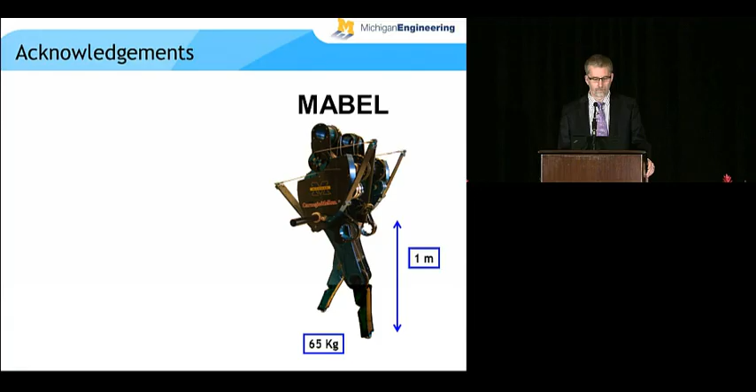So I'm here because of what my students have accomplished on Mabel. Mabel is roughly human size, but has some special features that we'll highlight shortly. The robot was designed by Jonathan Hurst, but we did all of the assembly, every bolt, every wire, every piece of electronics at Michigan, and it was done primarily by Koushil Sreenath and Hae-Won Park. Now, their control algorithm development was supported very strongly by prior work of Morris and Poulakakis, and then some technical contributions of Ramezani. And finally, it gives me a lot of pleasure to acknowledge that much of the work we've done on Mabel is based on what we had accomplished with the Robea team in Grenoble, France on Rabbit. Algorithms we implemented in 2004 are still working on that robot.

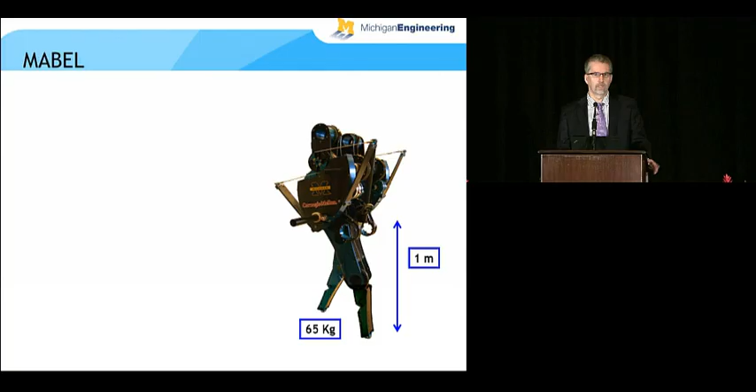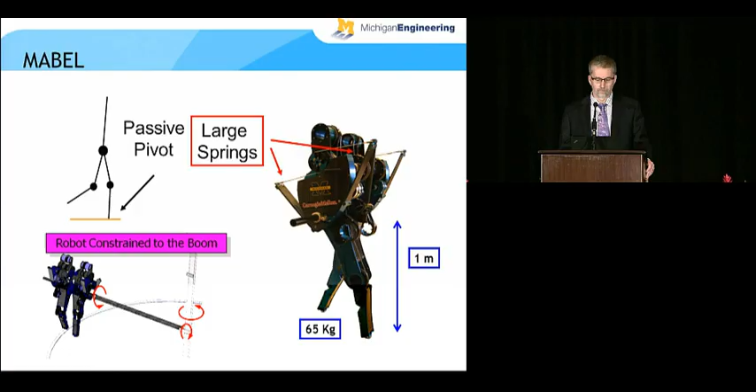In terms of sensing, it's really the minimal set. There's not a camera on the robot nor in the room. We measure joint angles, and then there are switches on the ends of the legs to detect when we have contact with the ground. Velocities are computed numerically.

So let's get an idea of what Mabel can do. So it can walk really slowly. Takes a lot of balance there. For a short time, it held a land speed record for a bipedal robot. Its nominal gait is very robust. Clearly, these are not planned footsteps.

It runs with passion. Right there, it's setting a 9-minute mile. And you have to go see it in slow motion to appreciate the elegance of the gait that Koushil and Hae-Won implemented on the robot.

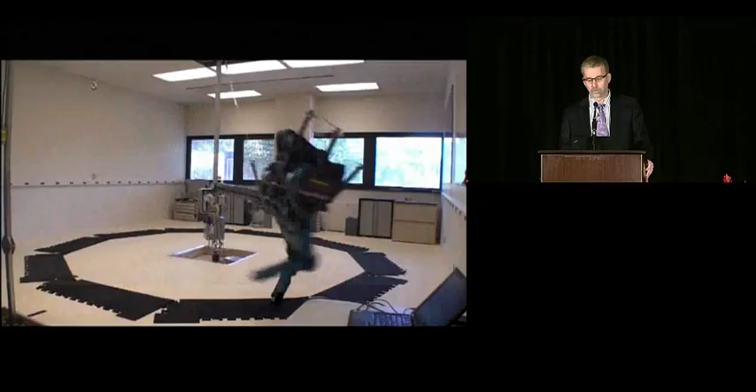Now, in all of our videos on YouTube, we terminate them with the robot falling. The purpose of that is to insist upon the fact that the bar does not hold up the robot. It provides side-to-side stability, but it's the feedback laws generating good ground reaction forces at the feet that keep the robot upright.

Okay, so here's what I want to accomplish in this lecture. Give you some background information on robots and some of the pioneers in the area. Then we'll get into the technical part of the talk on models and feedback control. Some of that will be a little bit tedious. Then we'll do experiments. Those are fun. And then we'll wrap up very quickly.

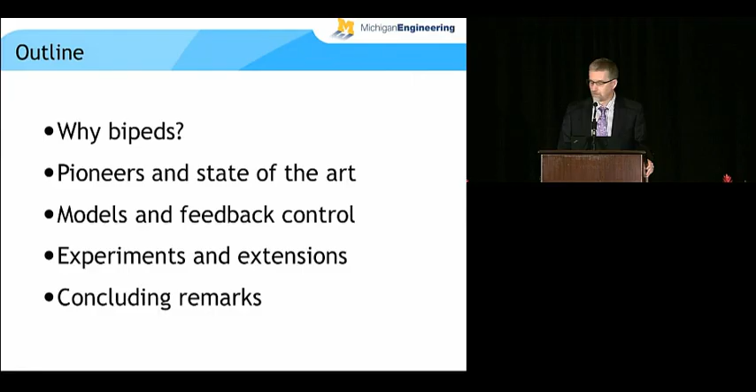Okay, so why legs and why bipeds? Well, it's estimated that 70% of the land surface of the Earth cannot be accessed with wheels or tracks. And even places where you could go with tracks, you probably wouldn't want a robot using tracks going up and down your stairs. Because of that, there is a surprising number of companies right now positioning themselves for the home service market.

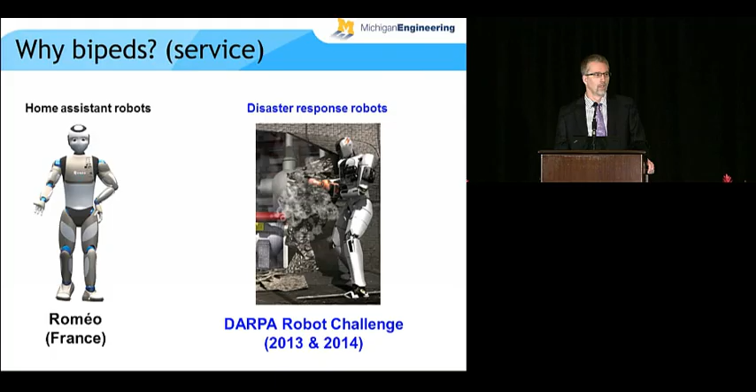Now, we all know what DARPA did for autonomous vehicles several years ago. Well, in 2013 and 14, they're having a DARPA Robot Challenge to try to do the same thing for disaster response robots. Many members of our community are on teams for this event.

Okay, let's look at some of the pioneers in the area. Some of them human, some of them not. The first walking robot is 40 years ago at Waseda University, WL5. It had a very awkward gait. But through a sequence of innovations, it's been evolved to Wabian 2, a very nice humanoid robot.

During those extensions, they came across a control heuristic that they like. They organized the posture of the robot such that the center of mass evolves as an inverted pendulum. So we will come back to these simplified models later. Try to remember, inverted pendulum.

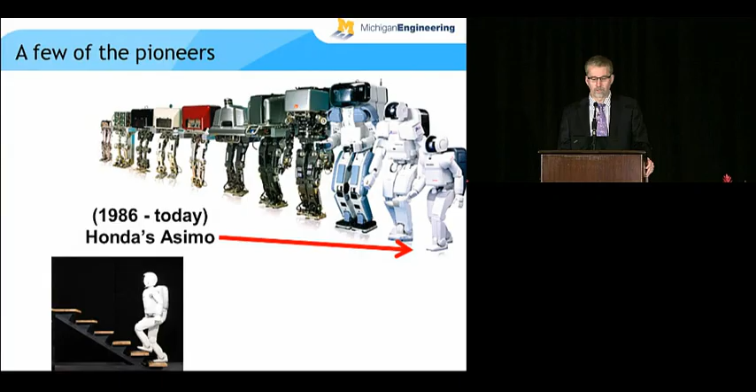Asimo is probably the most famous robot out there. It too is the result of a long line of robot development at Honda. It walks easily up and down stairs, and it can run. Running means you have to have at least a small phase of the gait with both feet off the ground.

Go! And there goes Asimo. There goes Asimo in slow motion, and look for the flight phase, both feet off the ground. Hard to see. It's short, several milliseconds.

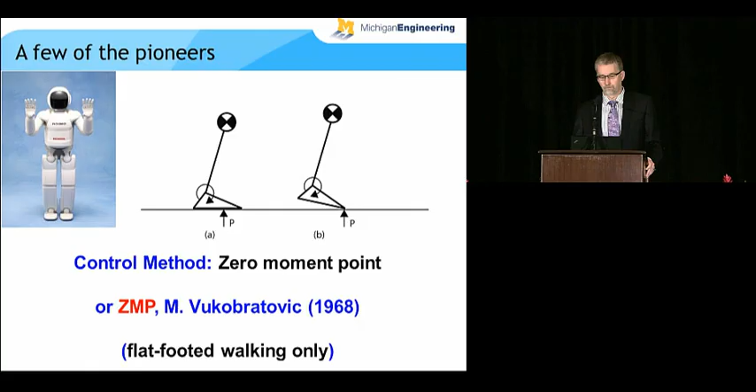Now, the gait on the robot is as much a factor of the control law used on it as it is the hardware of the robot. It uses something called the zero moment point, where you organize the ground reaction forces on the stance foot in such a way that the center of pressure remains strictly within the convex hull of the foot. This imposes flat-footed walking and flat-footed running, and so you're not allowed to bring the center of pressure to the edges of the foot, which cause foot rotation.

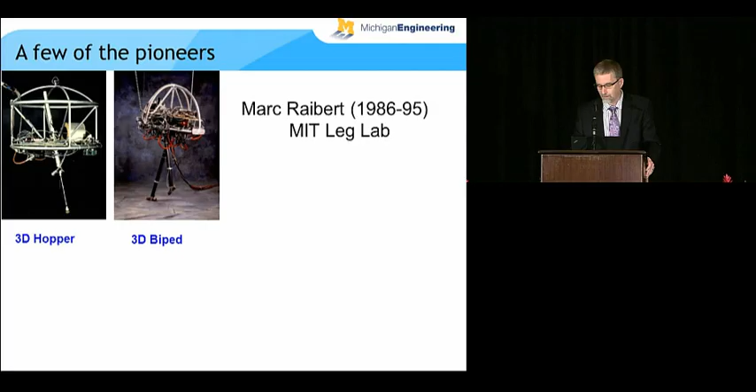Now, Raibert's passion was dynamic stability. He said, forget these big fat feet. I will use point feet, and I will design algorithms to keep these robots upright. And they became very, very acrobatic. Now, if you're not familiar with the name Marc Raibert, I assume you know Big Dog and Boston Dynamics.

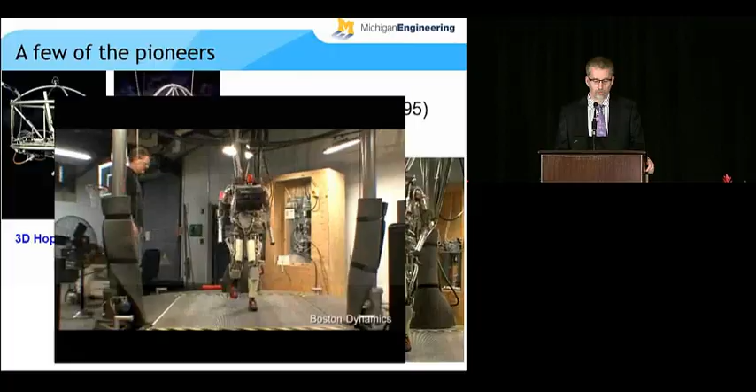He founded Boston Dynamics. Now, they also built a humanoid, Petman. Look at this bad boy walk. Wouldn't want to meet him in a dark alley. It's quite robust under shoves, handles these massive stairs, and though you can't see it, it's walking across a very narrow plank. Now, they do have cameras in the room there.

Raibert's control laws are also organized around a simplified representation of the dynamics. He uses a point mass to represent the center of mass of the robot, and then he assumes the legs are massless and springy.

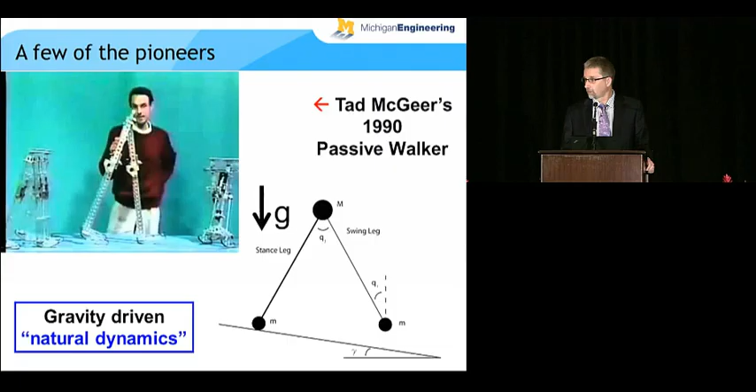Tad McGeer's passion in robots was energy efficiency. He decided he can build a robot that doesn't require sensing, actuation, onboard computing, or any power source whatsoever. In fact, his mechanical assemblages of links can walk down shallow slopes and have exponentially stable periodic orbits. This idea has been taken to its logical conclusion by Andy Ruina.

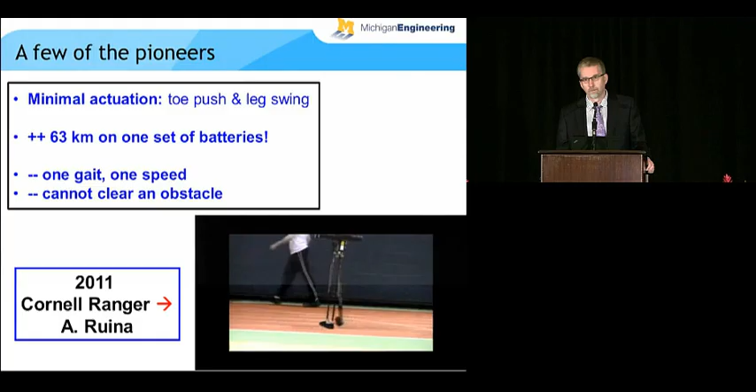He applied very small actuators at the end of the toes and on the swing legs so that it could walk on flat ground under its own power. This is the most efficient walking robot in the world, bar none. On the other hand, it has one gait, one speed, and could not lift up its feet to clear a book of matches.

Okay, so let me try to put these robots in perspective, and you'll kind of see where people are going in the field of bipedal locomotion. So I'll put a notion of agility or mobility, a qualitative notion, on the y-axis, and on the x-axis we'll have energy efficiency.

I'll borrow a measure used in the biomechanics community. It's actually a dimensionless number. It consists of energy consumed while the robot is walking, divided by distance traveled, divided by the weight of the robot. Weight is mass times gravity. This allows you to compare small animals like mice, their energy efficiency in walking, to large animals like elephants. That's why the biomechanists did this. You can also compare machines of different size and have a fair comparison.

So I will normalize the scales, because the numbers are still kind of arbitrary, such that the energy efficiency of a human is 1. And I hope you will accept that Usain Bolt is a highly mobile human.

Okay, so let's see our first robot: the Cornell Ranger. It's actually slightly more energy efficient than a human. It uses about 80% of the energy of a correspondingly sized human when walking, but it has one gait, as we saw. Now, what would be an example of a highly agile robot?

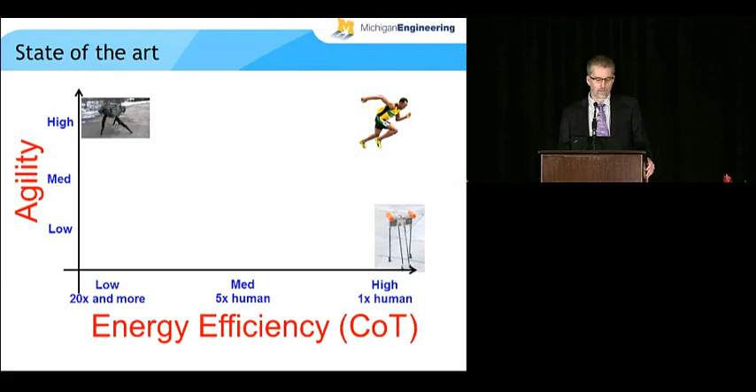Well, that would be Big Dog. If you've seen the videos, they are nothing short of stunning. But the flip side is the robot uses 20 to 30 times more energy than a human - that's more energy per unit mass. And unfortunately, Petman and Asimo are more or less in the same ballpark. They are energy hogs.

Interestingly, even though Rabbit was not really conceived for energy efficiency, the French robot Rabbit uses roughly 6 times the amount of energy as a human. Now, we never got the robot to run, but we came close. Its mobility is not bad.

Mabel, you saw, is fairly agile, very robust over ground variations. Mabel uses 3 times as much energy as a human when walking.

We're building a new robot. Our hope is it gets there. You can see what people want now - they really want energy efficiency and mobility in the same package. Working on the extremes, that's pretty much done. You now have to get it in the same package, and that takes all of mechanics, electronics, and feedback design to do right.

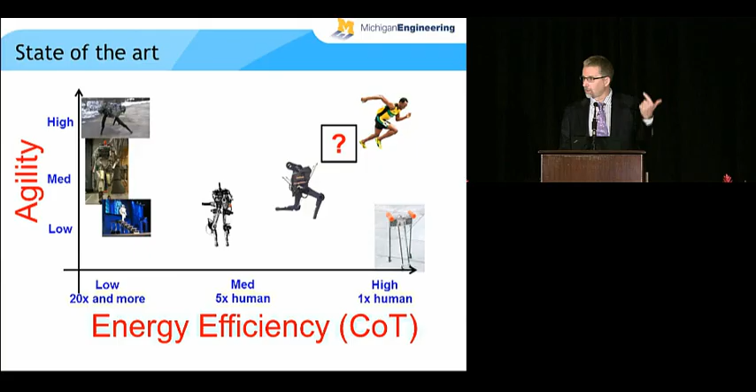Okay, so we saw that when roboticists were designing control laws for these robots, they were using simplified models and heuristics. The problem with heuristics is if I make a small change in the morphology of the robot, or build a robot that's nearly identical to yours, it takes me just as long to get those heuristics working on my robot as it did you. There's no time savings involved.

On the other hand, members of our community work on model-based solutions, which can be transferred easily from one robot to another. We often make sure our solutions apply to multiple classes of robots. And in many of our techniques, we include optimization as at least one of the steps, so we can be either the most agile, the most energy efficient, or do a trade-off of those two aspects.

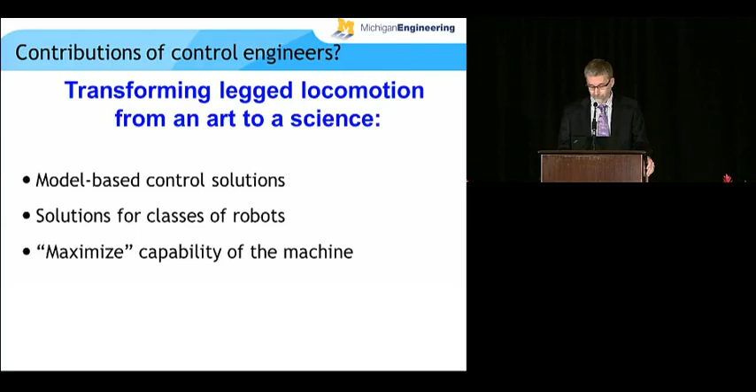Methods employed - already it's a lot, and it's still growing. There are even more methods presented at the meeting in Maui, ranging from passivity, controlled symmetries, to transversal linearization, etc. Many interesting techniques.

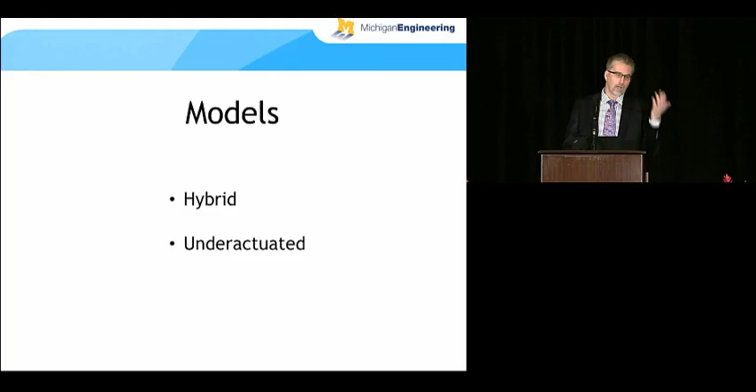Okay, so that's by way of background. Let's now get into the technical heart of the talk. We'll start with models. What I want you to understand when we come out of this is that the models are hybrid and under-actuated, and hence when we design feedback laws, they're going to have to deal with hybrid under-actuated systems.

So let's consider a simple periodic walking gait consisting of alternating phases of single support, meaning one leg is on the ground, and double support, meaning two feet are on the ground. In the single support phase, it's a standard open kinematic chain, and Lagrangian dynamics apply. Getting the model is very straightforward - use Newton-Euler, use Lagrange, use whatever you want, and you get the standard second-order robot equations.

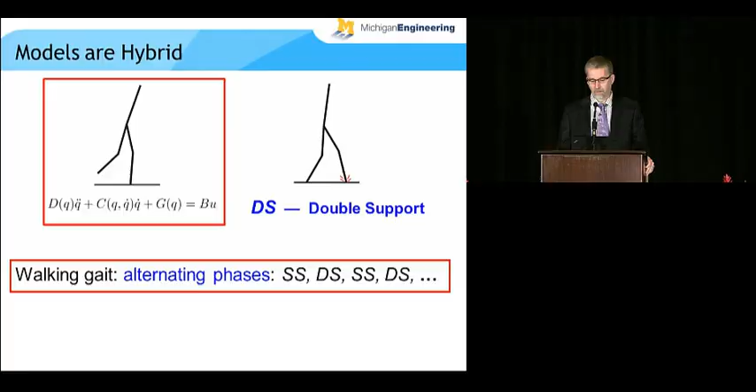Now the double support is a little bit different. When the non-support leg, also called the swing leg, comes forward and hits the ground, it decelerates very rapidly. So it's common to use a restitution law type model where you use an algebraic map to calculate or estimate the velocity just after impact as a function of the velocity just before impact.

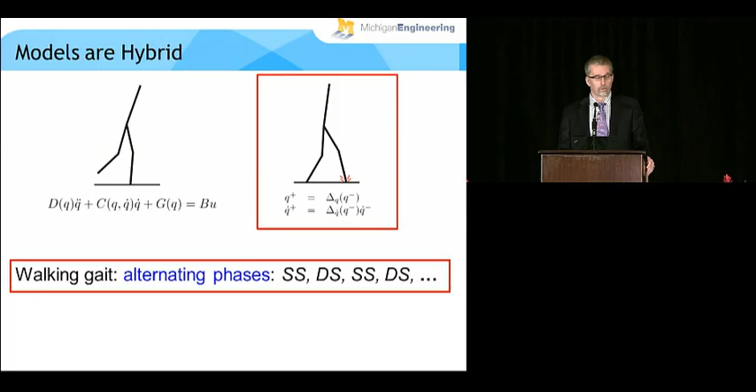So now you put this continuous and discrete actions together and you have a hybrid model where the switching action takes place when the height of the swing leg above the ground goes to 0. And then you maybe introduce a state consisting of position and velocities, and you have your standard hybrid model, which I've drawn here, assuming we have a single continuous phase. In many applications where you would use this, you'll have multiple phases, but later on, just to keep the picture simple, I will always draw a single phase, but you should understand this theory extends quite well to models with multiple phases.

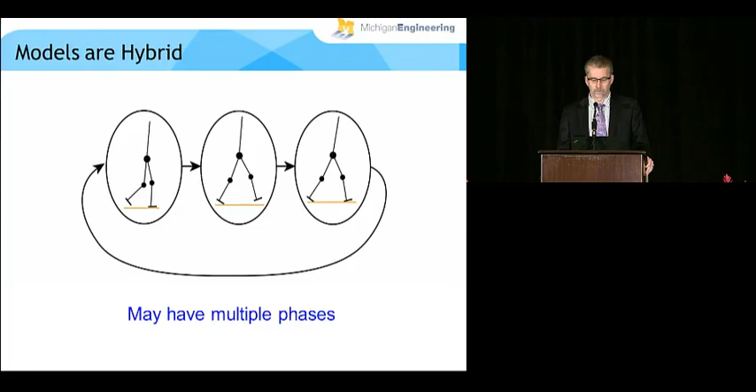Okay, so that's the hybrid aspect. Let's look at actuation. So the first thing to understand is the concept of degrees of freedom that the mechanical engineers use. So if you look at the position variables and then their corresponding velocities, if there are no constraints on the corresponding velocities, then the number of position variables is equal to the number of degrees of freedom of the model. And then the number of independent torques is the rank of the input matrix B.

So a system is said to be fully actuated when there is an independent actuator for each degree of freedom of the robot. And robots that have feet with actuated ankles, they are fully actuated.

So it's a common assumption to assume your models have that feature, but I find it to be rather dangerous for the following reason. If you apply just a little bit too much ankle torque one direction or the other, you roll up on the back or front of the foot, and then you are no longer fully actuated. And if your control law cannot deal with the underactuation, you crash.

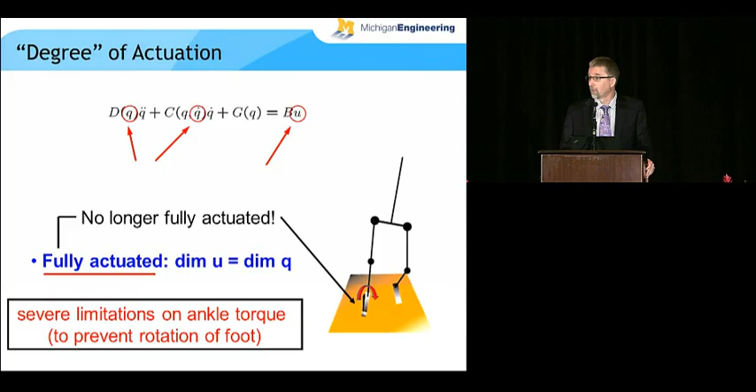This is even more severe in 3D because standard feet are much narrower than they are long, but this explains why when you see the common humanoids, you have a square foot. They want the same affordance sideways as they do forwards and backwards.

So I prefer to look at models, and this is inherited from the work of Raibert. I prefer to look at models with passive point feet. So the robots are walking on stilts. They're definitely under-actuated.

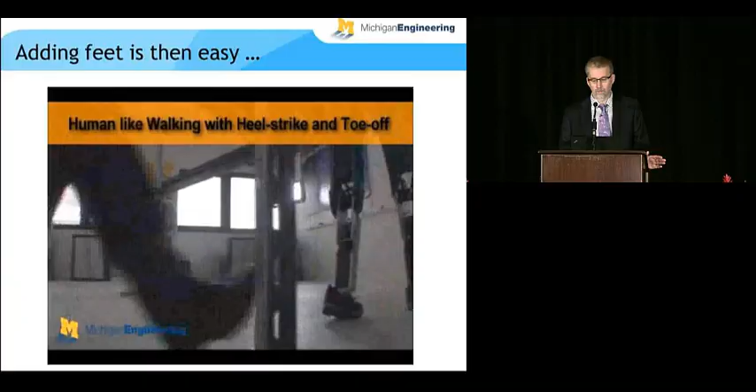And what's nice about that is if I get the robot walking with point feet, as you saw earlier, and now I add a prosthetic foot that's still passive, I can use exactly the same control law. And there, I don't know, who's walking better, Mabel or the cameraman? You choose.

Another way that under-actuation comes about is if you have series elastic actuators. So this means an actuator and a spring, and then the end of the spring is connected to a joint. The spring is used for storing energy or for filtering high ripples on torque, etc.

Okay, so our models are hybrid and under-actuated. Let's see how we can design feedback controllers for these models. So I want to give you some control intuition, some control theory, and some control computation.

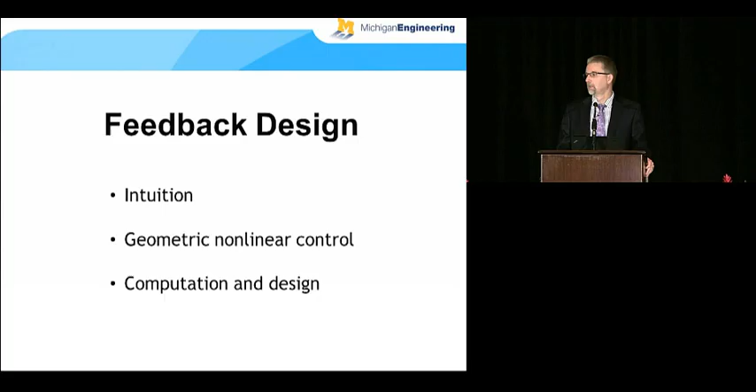Now my real motive is to have you at the end understand the relationship between hybrid invariant surfaces in hybrid models and gaits in bipedal machines. You can tell me how I do at the end. But remember, we're going to start with the intuition. The intuition is that you can use holonomic constraints on a machine to synchronize its joints.

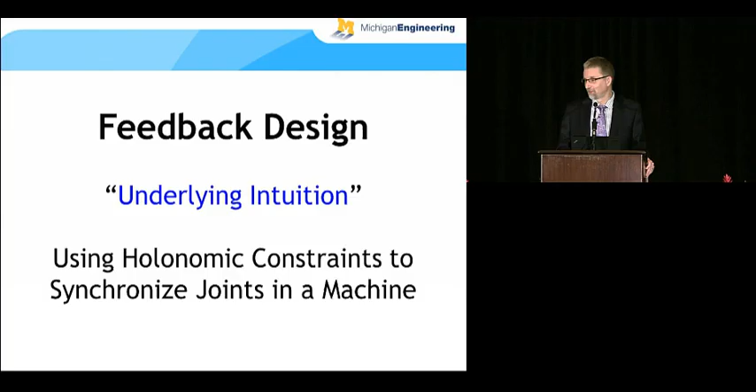I will draw my example from Theo Jansen, who is a world-renowned kinetic sculptor. And I want to add that Theo Jansen was not inspired by my work, but my methods did not come from him either. But it's just a fun way to understand the notion I want you to get to, which is a virtual constraint. So here we go. That's Theo Jansen. Here's a cartoon of one of his machines, all the links coordinated via a crank. He manages to make things that look so close to being alive that you almost can't believe that they aren't.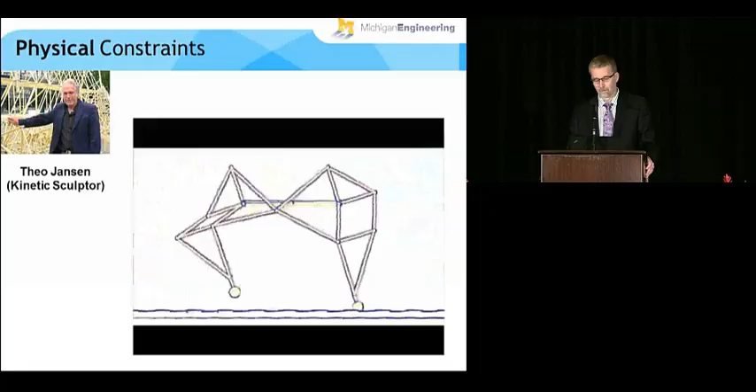I know you'd like to see more of that, but we don't have time. So there's dozens and dozens of legs on there, hundreds of links, all synchronized to a 1 degree of freedom device called a crank. So this is what I mean by using joints being synchronized to a crank.

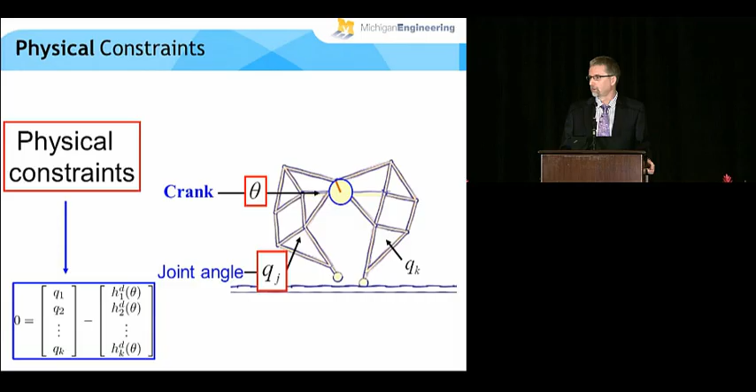Now these are imposing a set of holonomic constraints, so they are done physically with bars, chains, gears, etc. I will call a constraint virtual if I do not use the gears and links to impose the constraints, but I use feedback to do that. So what do I mean by that?

So here's Theo Jansen's mechanism with the links connected to the crank, imposing his set of physical constraints. I remove those connections. I equip his device with sensors and actuators. I probably need to add an embedded processor as well.

But then I pose a control problem. I define an output that's equal to the positions of my joints minus how I want them to evolve if they were actually connected to that crank. And then I design a feedback controller that drives those outputs to 0. If I can asymptotically get them to 0, then I have imposed these constraints in a virtual manner. That's what I mean by a virtual constraint.

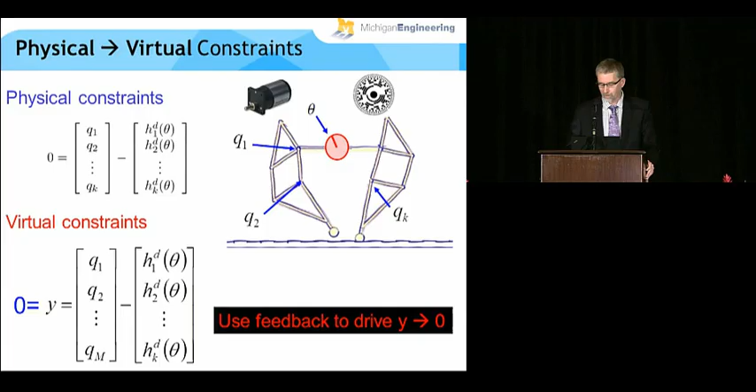Easy said, because Theo Jansen's mechanism has a crank. Where is the crank on a biped? Look at the line connecting the hip to the toe, and look how it evolves during a step. This gives me a hybrid virtual crank that resets after each step. It's monotonically increasing.

So what I can do on the biped is synchronize the evolution of the knees and hips of my robot's joints, for example, to this virtual crank so as to synthesize a gait.

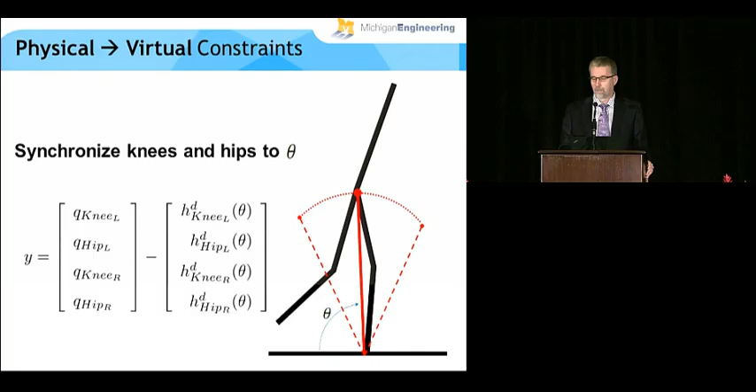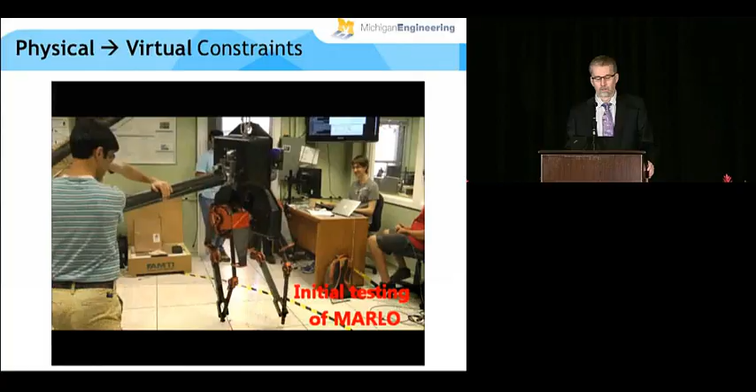And if you have a hard time imagining this, here's it being done on a robot. The students are pushing this bar forwards and backwards, which makes the virtual crank angle advance and go back. And the joints of the legs are simply being commanded to play out a gait. So it's just walking forwards and backwards there, being pushed passively, but the motion is ensured by virtual constraint.

Okay, so that's the intuition. Replacing physical constraints with feedback, sensing, and actuation to get a virtual constraint. The advantage of a virtual constraint, I can change it by changing a few lines of code, where Theo Janssen has to get out a hacksaw and glue to modify his mechanism.

Okay, so this is the technical part of the talk. Hold on, here we go. First thing to understand, what does a periodic solution of a hybrid model look like?

Our system is hybrid, so it has a switching surface. It's a hypersurface, meaning it's codimension 1 in the state space of my continuous model. Solutions are defined by following an initial condition of the continuous dynamics until I impact the surface. Then I apply the reset map. Then I continue with the flow of my continuous portion of the model, et cetera, et cetera. I think you get the idea. That's what a solution means of a hybrid system.

Now, what is a periodic gait? Well, if after I apply the reset map, I come back exactly where I started, I now have a periodic motion. So this would correspond to a periodic walking or running gait in a hybrid model of a robot.

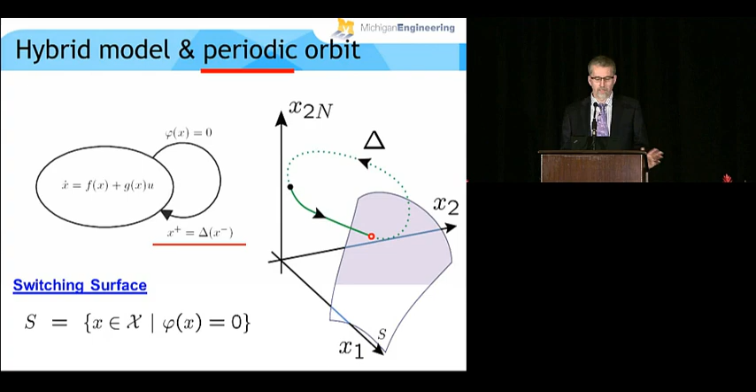Okay, so let's now move on to understanding, well, how do virtual constraints play out in this mathematical environment? So I add my differential equations from the continuous phase of the model, and I pose my outputs, which depend only on the position variables, so they are virtual holonomic constraints. What I want to do is design a feedback that drives y to 0.

Unfortunately, this is mathematics, means we actually have to make hypotheses that are correct under which we can actually do this. So what I'm going to do is assume some regularity conditions, a little stronger than I actually need just to keep the discussion simple, but I will assume the outputs have vector relative degree 2.

So what does that mean? If I differentiate my outputs once, they will depend upon the velocities. I differentiate the derivative of the output, it then depends upon the accelerations. In my second order model, the accelerations are related linearly to the torques, hence the second derivative of my output can be written as a matrix times the torques in the model plus a lot of other messy stuff. If this matrix I've underlined is square and full rank, then the outputs and the system have vector relative degree 2.

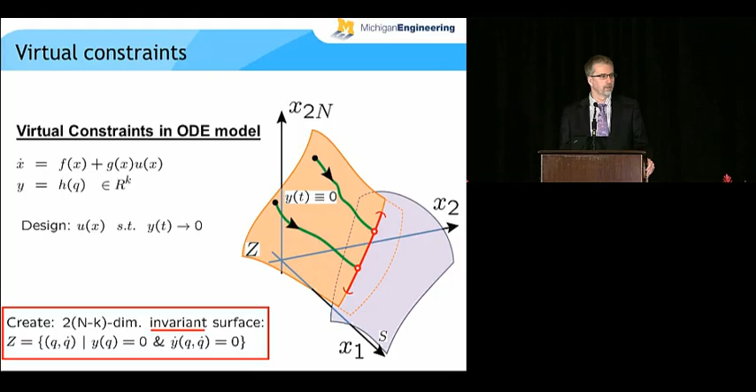Under this, we can do two things. We can for sure design a feedback that sends the outputs to zero, but according to Byrnes and Isidori, we can do much more. In particular, we create a surface that's given by the set of zeros of my output and its derivative. This feedback that I apply to create this surface has the property that the closed loop system renders this surface invariant, meaning if I start with initial conditions on the surface and flow along the solutions, I stay on that surface. So this is definitely the Byrnes-Isidori zero dynamics of 1988.

In the case of these robot models, you can write it down in a form that looks like a second-order system, and sometimes they are Lagrangian and sometimes not, because our actuators do inject power.

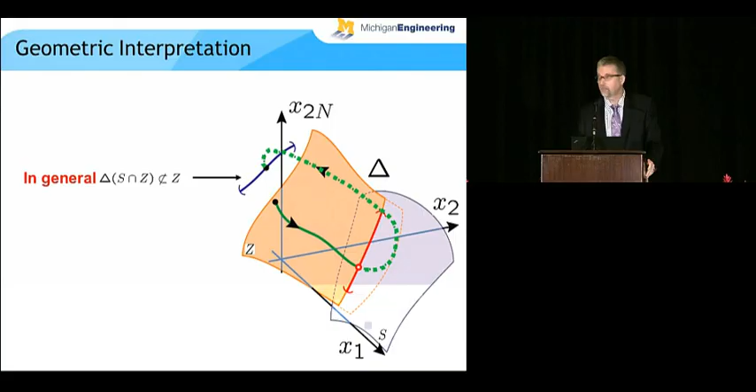Now, we did all that design of the surface without taking into account the reset map. So when we apply the reset map, we may end up on the surface or we may not. We've studied the problem of how you can automatically come back to the surface. We've studied it a lot. We know a number of situations. We know exactly how to design that surface such that it's invariant under both the continuous and discrete portions of the model. And very importantly, we know how to design that surface so it does not limit the kind of periodic orbit I can create.

If I can create this invariance but I only get orbits that use a lot of energy for walking, it's not interesting. If I can design this invariant surface and only get gaits that are stumbling and not very fast and agile, it's not very interesting. So you want to prove that there are essentially no restrictions on the type of periodic orbits you can achieve when you also deform the surface to make it invariant under both the continuous and discrete aspects of your model, and this gives you the hybrid zero dynamics.

Okay, so we're pretty much done with the hard math. What we have now is a divide and conquer approach to designing gaits for bipedal robots. We separate the problem into proposing a set of virtual constraints, creating an invariant surface, shown on the left, and you get a nice low dimensional model. That is essentially separate from the feedback that you use to drive the set of virtual constraints to zero, which actually imposes that surface and makes it invariant.

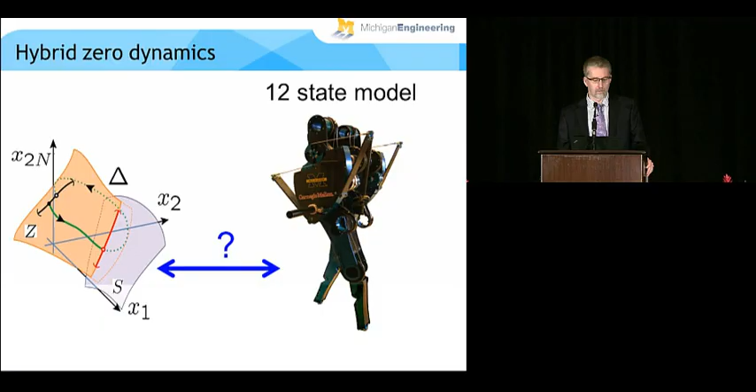So what do these hybrid zero dynamics tend to look like? For Mabel, the model has 12 states or 14, depending on how you want to look at it, but the springs on the robot are so stiff that when a leg is off the ground, the spring is essentially not there. So in that case, we get a 12-state model for the robot. The zero dynamics look approximately like the spring-loaded inverted pendulum of Raibert, with the difference that it's a distributed mass pendulum, and there is some damping in parallel with the spring.

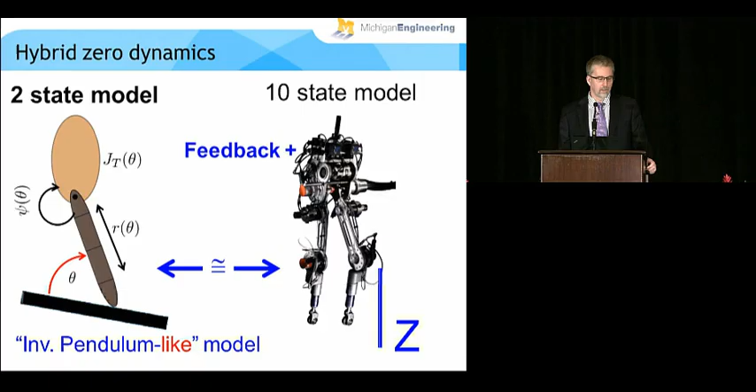If you go back to the French robot, which has no springs, it has a 10-state full model. The hybrid zero dynamics has 1 degree of freedom, 2 states, and it is a distributed mass inverted pendulum.

Let's look at how you design outputs to drive these virtual constraints to zero. One way to do it is to apply the classic robotics method of computed torque. We call it input-output linearization here at the CDC. That works okay. A way that we've just started investigating is called control Lyapunov functions.

We're using the work of Artstein and Eduardo Sontag. So to do this, you define a positive definite function on the output and its derivatives, only y dot here because I'm doing relative degree 2. And then you want to differentiate that function and choose the input such that v dot is sufficiently negative definite. Here we would have local exponential stability.

Okay, so key is rendering v dot sufficiently negative definite. Now what's interesting is you can try to choose the control u of smallest magnitude that meets that inequality. Randy Freeman taught us how to do that. So you can set up a problem, choose u of minimum norm, such that v dot is sufficiently negative definite. Even more, you can add constraints to it, so you can explicitly account for constraints in your feedback design. We did not know how to do that with input-output linearization.

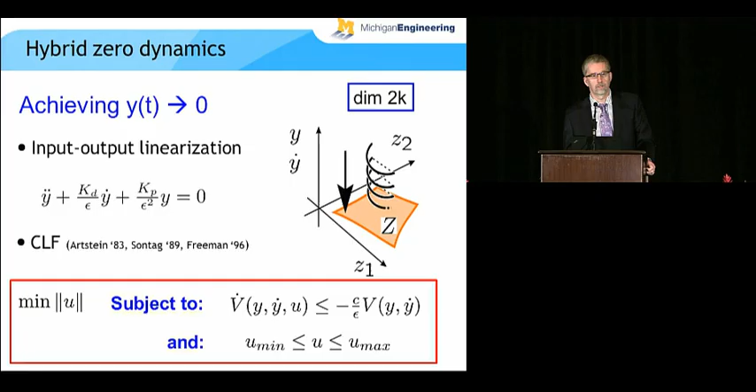Okay, we have once again this divide and conquer. The final thing we need to do is make sure that, having done the divide and the conquer, we've got a periodic orbit in the hybrid zero dynamics and our y's are being driven to zero. Does that make everything work in the whole model? Do we actually get an asymptotically stable or exponentially stable periodic orbit in the overall model?

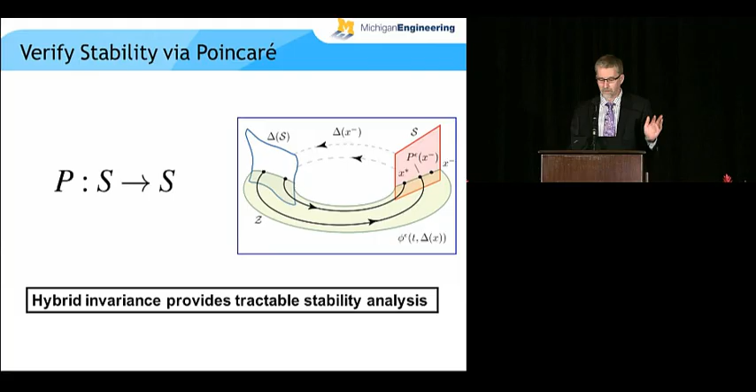I have no time to explain Poincare maps, just to say, everybody who knows Poincare maps, that's what you do here to check stability. The hybrid invariance part allows you to carry out your analysis only on the hybrid zero dynamics, as long as you make the dynamics and the y variables converge sufficiently rapidly. That's what the theorem says.

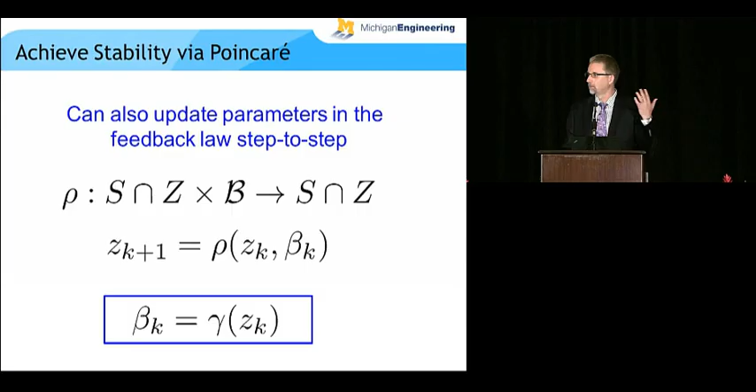Now, your solution in the hybrid zero dynamics is often already asymptotically stable, but we know cases when it's not. There, what we do is introduce a few extra parameters in the orbit, and we render the Poincare map into a discrete time system evolving on the Poincare surface. We then design feedbacks to stabilize that equilibrium point, so we have a truly hybrid controller with continuous and discrete actions. And with that, I will close with the theory on feedbacks.

Okay, let's now look at feedback computation. We try to make things easier for ourselves by posing these virtual constraints in a very special form—in the form of things we want to control and their desired evolution.

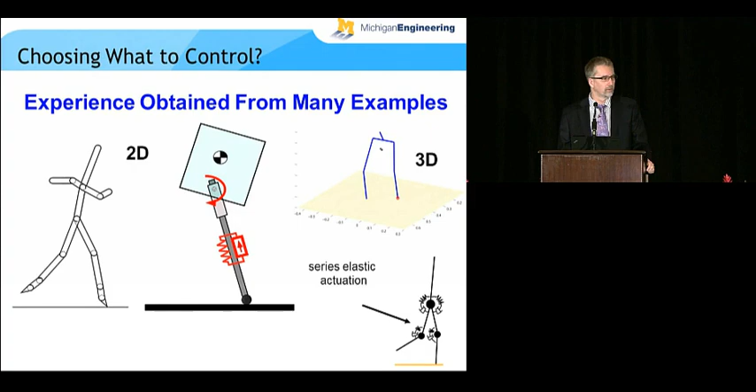Choosing what to control is an art. It varies heavily from one robot to another. We've learned how to make these choices by studying analytically special classes of models with features similar to the real robots in our lab. We've done that in 2D and 3D, for robots with springs and without springs, etc. I'll show you what we actually control on Mabel once we understand better the actual hardware of the robot.

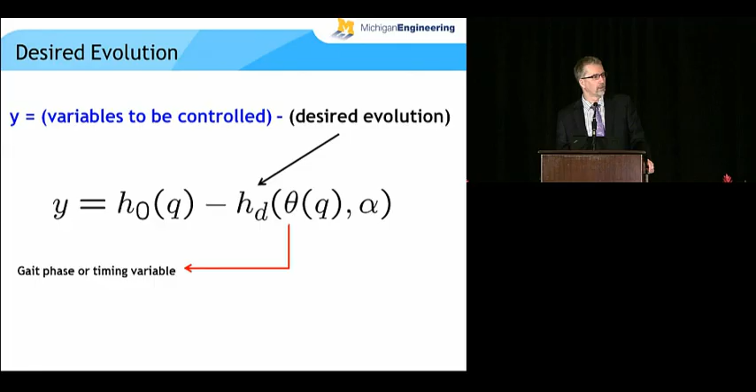So let's go to the part that's pretty much systematic—designing the desired evolution of these virtual constraints. Notice that we parameterize them in terms of this virtual crank. It's a phase or timing variable for us, but it's not time; it's monotonically increasing. We choose these functions amongst a family of splines, and we give ourselves a number of free parameters to choose. Those parameters are chosen by optimization.

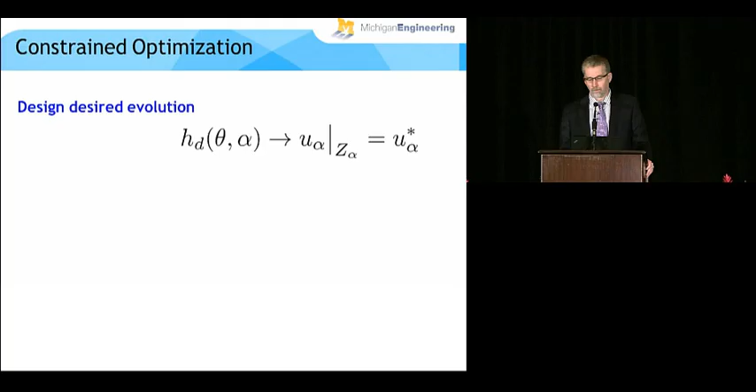Another beautiful feature of the work of Byrnes and Isidori is that I can have a whole family of output functions and still calculate in closed form the torque I need to slide along the family of invariant surfaces created by their theory. That allows me to pose a cost function. Here I'm using roughly the integral of the energy in the inputs divided by the length. If my mass of the robot were varying, I'd throw that in—then it's really cost of transport.

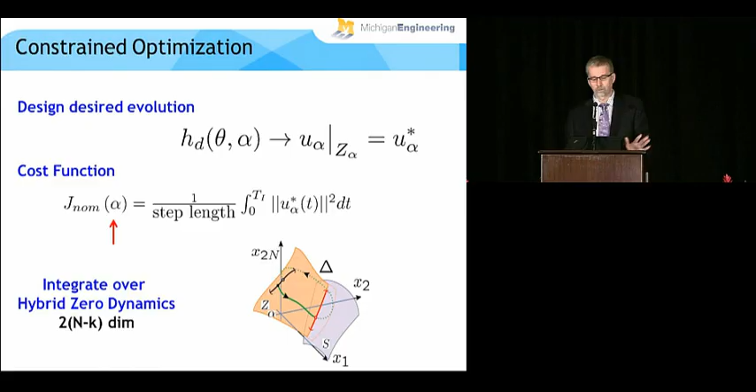So I minimize that cost function, integrating the dynamics over the reduced order model. For Mabel, this is a 4-dimensional state space instead of the 12-dimensional state space I'd otherwise have to integrate to solve this numerical optimization problem. It's here that I impose constraints that give me the various features I want in my gait—whether periodic or not, a desired walking speed, how the ground reaction forces have to be to keep the robot upright, etc.

Now, my students know this, and anybody who's going to use it needs to know that this optimization problem is really the hardest part of the whole theory. It's non-convex, with many local minima. We use multi-start, etc., but it would be nice to have better methods here.

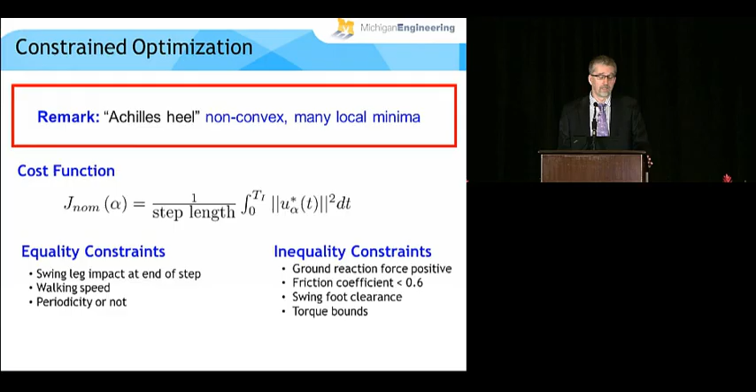Okay, so that's the overall feedback design process. Let's go ahead and apply this to Mabel.

So Mabel's hardware—we've already seen she has these very large springs. They're not so elegantly packaged, but she was designed by a PhD student at Carnegie Mellon, so it's a pretty interesting robot. All of the motors, the gearing, the power electronics, etc., are all up in the torso of the robot. This makes the body have a center of mass that's roughly human-like, and the legs are relatively light—and you want light legs if you're going to swing them back and forth.

The gearing and motors are organized into a set of differentials. The outputs of these differentials are connected to the hips and the knees. Now, it's a little easier to see if I turn these differentials sideways.

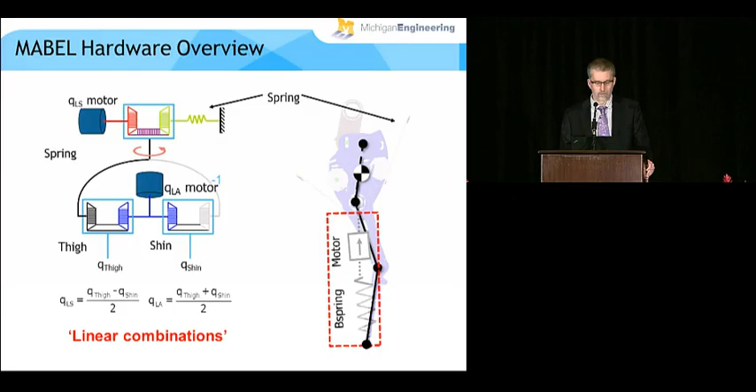The bottom two differentials are forming linear combinations of torques from the two motors and the springs. Those combinations are organized as follows. Let's look at the very top of the differential. That forms a series connection of a motor and spring, and the bottom differentials organize it such that that torque is applied on the line, the virtual line that connects the hips and the ends of the feet. That turns the leg into a pogo stick, as you saw when Mabel was running. And then the other motor controls the angle of that pogo stick with respect to the body.

Now, if you understand this qualitative view of how the robot goes together, then what you want to choose as the H0 portion of your virtual constraints becomes more intuitive or obvious. Because the torso is so heavy, keeping it upright is very important, so one of the things we control is the absolute angle of the torso.

Now, how do you get energy in and out of the legs? Well, you need to move the rest point of the spring, and so we do that. And then on the non-stance leg, once again, the spring is so stiff there that you can treat the leg as if it is non-compliant, and so you can just control the angle of the knee and the hip such that it folds properly and then brings itself forward and prepares for the next impact. So that's the choice of virtual constraints.

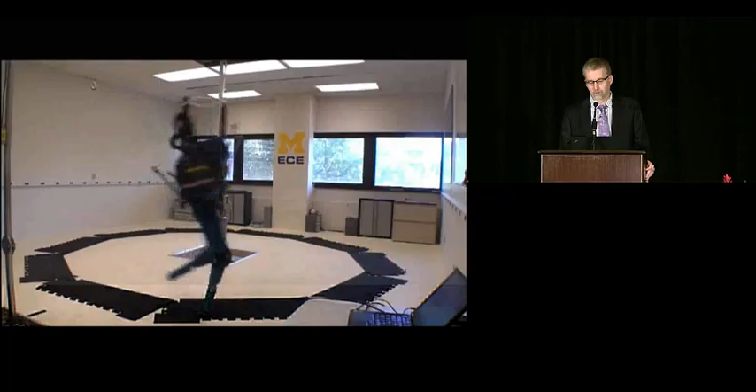And when you do that, that's what gives Mabel this distributed spring-like inverted pendulum characteristic. And now with that in mind, look at Mabel running here in slow motion and see the nice bounding gait that she has. You don't need a high-speed camera to see that the legs are high above the ground, and in fact 40% of the gait is spent in the air.

Okay, let's go back to walking. Let's just do a basic walking controller using the methods that I've outlined here. So we're going to assume the environment is flat, and if by chance gentle ramps and steps up and steps down get introduced in the lab, we'll try to handle that by fundamental robustness of the controller. Remember, Mabel has no sight, it's blind.

So we'll use the cost function I mentioned before. We'll shoot for a periodic gait. We fix the speed. We'll make sure that we don't need a super large coefficient of friction in order to keep it upright. And the only thing I'm going to do here that I wouldn't do for absolute best efficiency is make sure the swing leg has 3 centimeters of clearance in the middle, so it has the possibility of stepping up onto an obstacle.

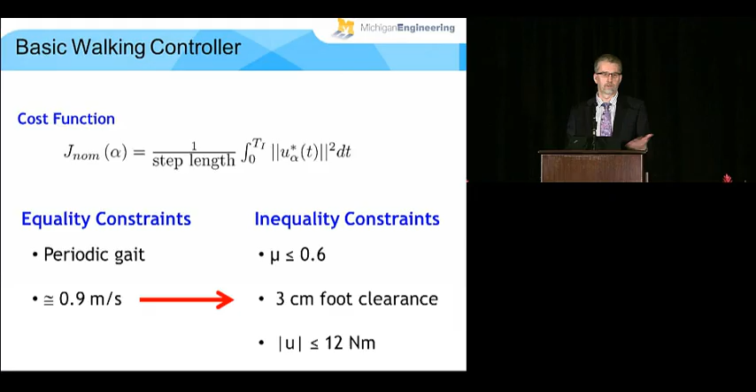Okay, so here's our basic walking gait. Walking around the lab. I don't have eyes, I'm completely oblivious to what's coming up. I don't care, I just walk all over it. Okay? That's Mabel. At least that's how we think Mabel thinks.

Okay, so they're just going to keep adding obstacles until the robot falls. It slowed down there because it had to turn kinetic energy into potential energy. Even more higher step, more potential energy. Okay, so I've sped things up in between, obviously, so the video doesn't take forever. Now watch this one carefully, please.

Pretty neat emergent behavior. If you're using virtual constraints, you don't care if the robot's hip moves with respect to the ground or the stance leg moves with respect to the hip. You get the same forward motion of the swing leg catching the robot. It's amazing. Now watch this next lap carefully.

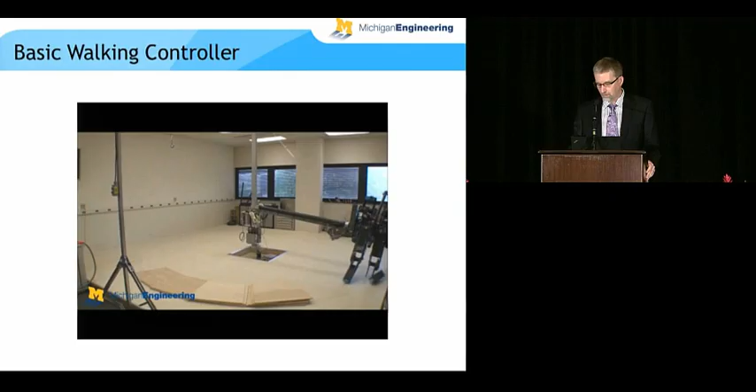So our next phase was to move into putting in some fairly large perturbations. And in each state of the process, I'll try to give you a little bit of idea of the state of the art, the challenges, and then underline also that the obstacles are unseen.

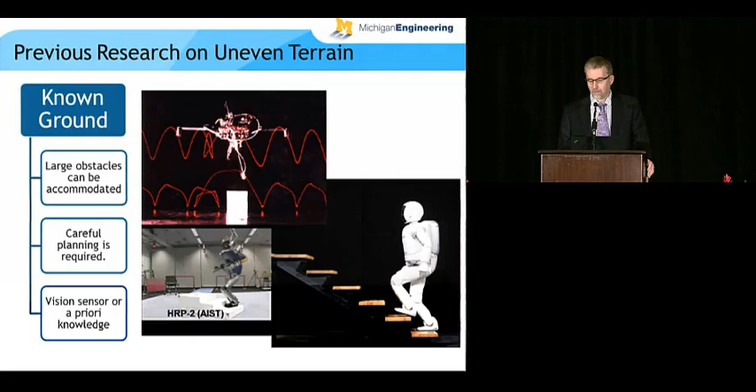If you're doing known ground, there are two cases to consider. One, where the robot has a camera, or you have a Vicon system in the lab giving the ground profile to the robot. In this case, robots like Asimo walk up and down stairs with no problem, and Raibert had robots jumping over very large blocks. This takes careful planning of foot placement. We don't have a camera, so we don't work on this.

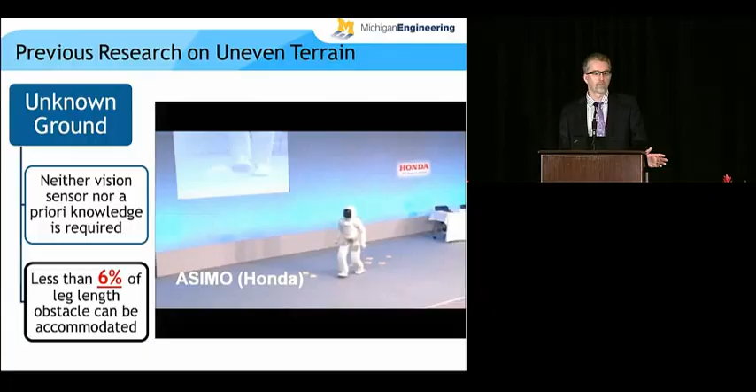On unknown ground, you assume there's no camera information being used, either on the robot or in the lab. There, the state of the art in terms of ground perturbations is roughly 6% of leg length. I give it as percent of leg length so it doesn't matter whether the robot is short or tall, it's the same relative size obstacles.

Mabel's legs are 1 meter long, so 6% of leg length is 6 centimeters. With the baseline controller, when the leg broke, strangely enough, that was about 6 centimeters. Really is state of the art.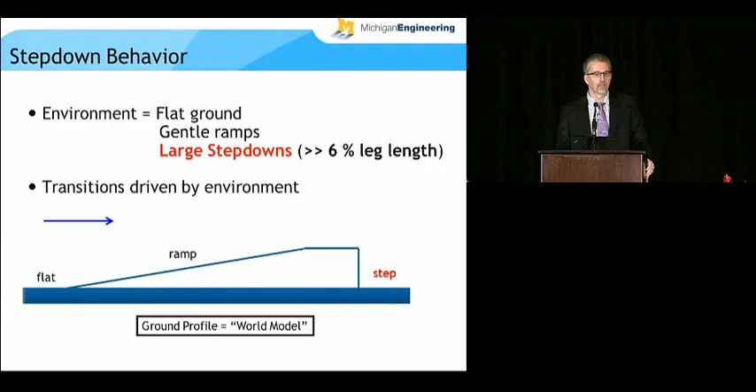So I challenge the students to think big, really big. Can we step off something that's the height of a standard step in a stair, 20 centimeters?

Robots are more capable than us in one aspect. When Mabel is in a position like this, because it knows the positions of its joints, it can measure in a millisecond the depth of the height difference between the two legs. So once it has stepped off an obstacle, it knows what it's dealing with, but before that, it has no idea. Keep that in the back of your mind.

When you step off, you have a huge reduction in the amount of potential energy, so all of that is converted into kinetic energy. The torso's bouncing everywhere, and you have broken legs.

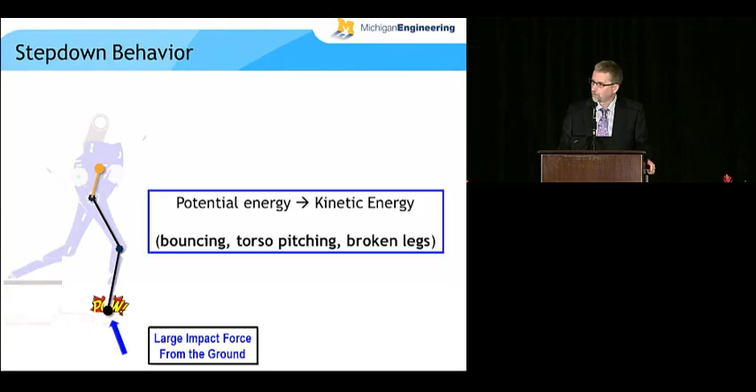So what the student decided to do, without consulting me, was to turn the leg into a huge shock absorber after that step.

The parameters in the shock absorber were designed using optimization, very similarly as we've discussed before. What he was really working on was the ground reaction forces, making sure they don't get so big as to cause the leg to buckle. He also understood that torso pitching was a secondary cause of the leg breaking, so he minimized the amount of torso pitching subject to bounds on ground reaction forces so it wouldn't slip.

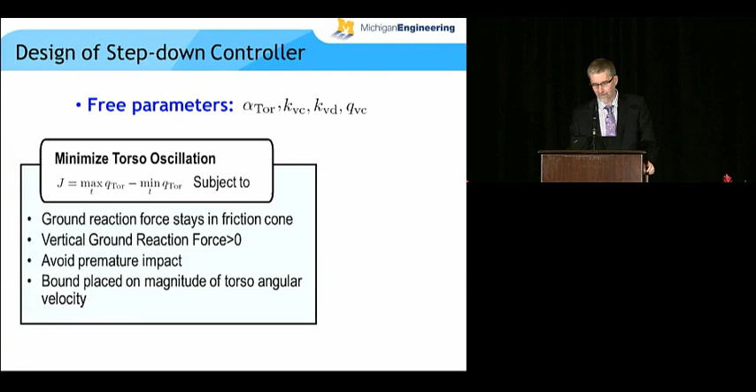A priori, we already knew the baseline controller could handle a 5 centimeter step down. So maybe we need to design several of these, one that works between 5 and 10, another between 10 and 15, one between 15 and 20, etc. Once the robot has stepped down and knows how big it is, we just switch into the right controller and go. Turns out the baseline controller and one other is enough to cover the entire range — the controller that handles 20 centimeters will go all the way down to 5 and work just perfectly. So we can use a single additional controller in tandem with the baseline controller.

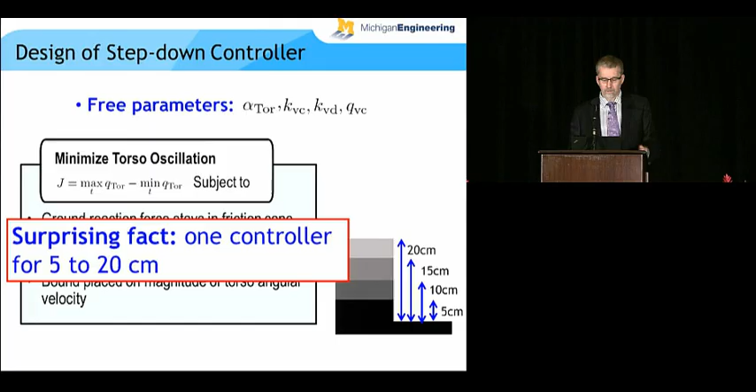So here's the controller in action. Boom, like nothing. I wish I could do that.

In slow motion: we measure how much the ground depth is, we apply the correct controller, we wash out the energy in the system with the shock absorber, we transition back to the next phase, and go on like nothing happened. I'd be picking myself up off the floor.

So that's one thing, to be walking and step into a hole. We've all done that — we're walking and talking to someone, we step off the curb, and it hurts, but often we manage to stay upright. The thing that really gets us, though, is when we're walking and we trip over something. That's really, really unpleasant.

Remember, Mabel has no camera, so I didn't really think it was possible that we could deal with tripping things, at least nothing very large. It's always good to have students who dream bigger than you do.

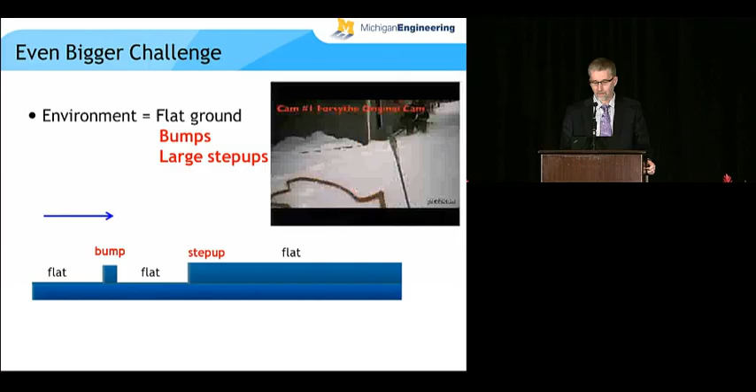So we're working now on extreme stability for disaster situations. What I'm showing you is the helmet cam of a firefighter. If you had a vision system, how good are you going to be at estimating the ground height there? Might as well keep that blindfold on.

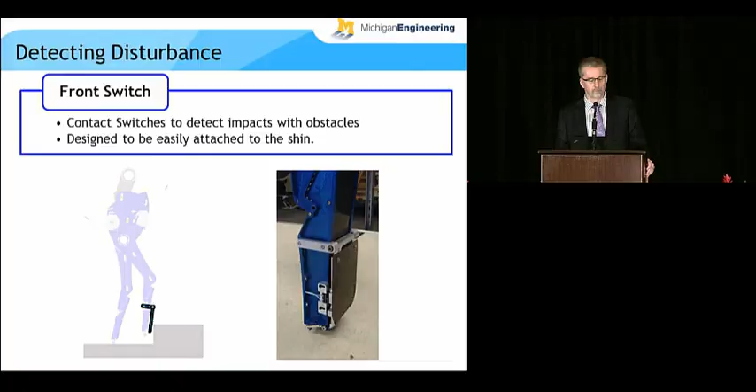So what we did was to give Mabel a chance to detect that obstacles were there. We put an additional switch on the front of the shin. It works like the nerves in your toe: you bump into something, you get feedback information. So now the robot has feedback from the base of the foot and the front of the shin, and using that information, they want to design controllers that allow it to handle tripping obstacles.

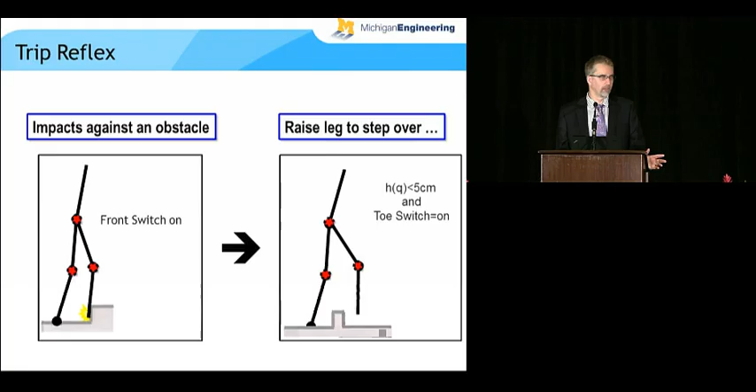Okay, so then when you hit, a couple of things can happen. I'll just show a few of them, keep this short. You could step up on the obstacle if it's wide, but if it's narrow, then you'll step over it. And you have no idea when you first start which one it is going to be. You just have to act differently once the leg has either landed up on the obstacle or back on the floor. So then we used a finite state machine to stitch all of these controllers together, and here's some results of it.

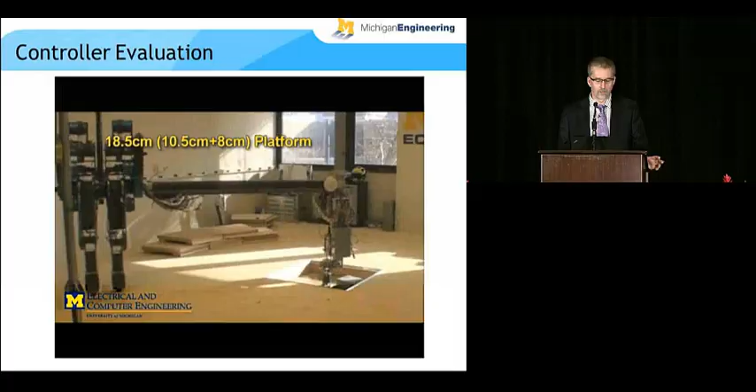Want to try this one at home? Remember, no camera, but it looks like it has eyes in its feet, okay? No camera. There's the state machine: step up, regular walking, step down, back to regular walking. Now we'll go back through that obstacle with a different initial condition. Up, regular walking, all the way down in one step, okay?

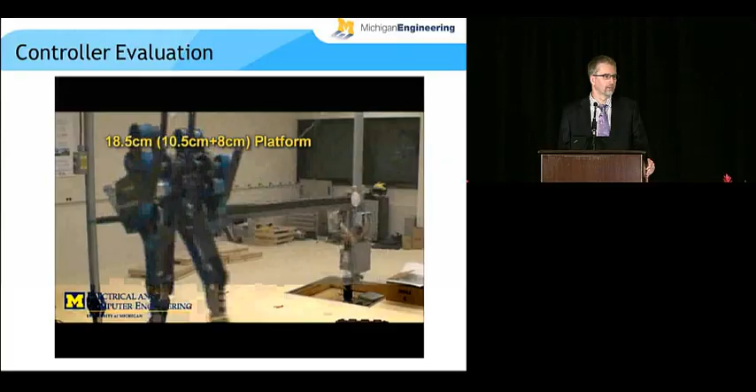Good thing that step-down controller works. That would hurt. Okay, at this point, we feel like we are geniuses, okay?

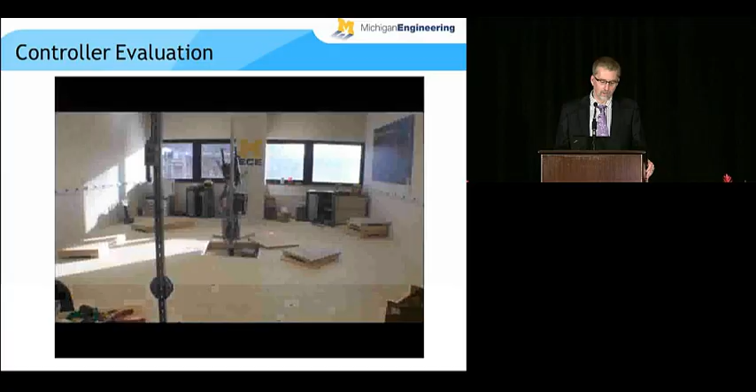But here's the dark side. Aha. There exist executions of my finite state machine which result in failure. Okay? Things I cannot handle. Here's one of them that you just saw.

So what's particularly hard to handle at the moment is to go directly from a step down to a step up without a regular walking step in between. The regular walking controller is so robust it just washes out all the perturbations in the robot and it's ready for the next perturbation. So if I could just arrange that all my obstacles that the robot would see were like that, we're done, but I can't, right?

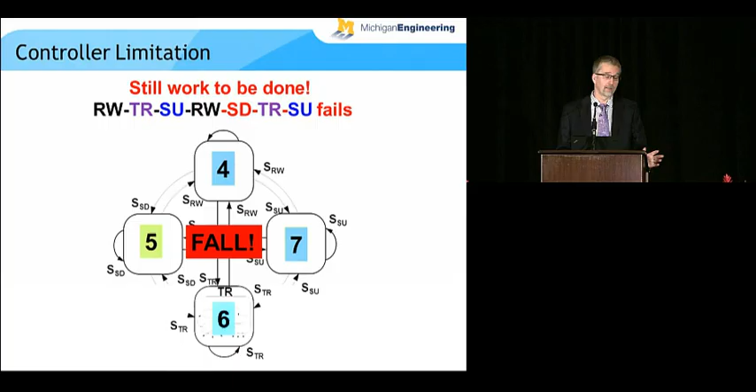So now here's my problem. I don't know if I need to add more behaviors to my finite state machine, such as a step down to step up transition without a step of regular walking. Or I simply need to design a more robust step up controller that can handle a wider range of initial conditions coming out of the regular walking and the step down. I don't know. How do I find out? This is a very interesting analysis problem, and we're stuck here at the moment.

Okay, so let's wrap up. Hope you've enjoyed this. It's been my pleasure to be with you here this morning and give this Bode lecture.

So the state of the art in control locomotion: if you're walking over a known periodic surface, and your robot is planar, the theory is in pretty good shape now. It's not perfect, there's still things to do, but a lot of the big ideas are there. There's quite a few experiments demonstrating that the controllers designed in theory seem to work in practice. There's some theory in 3D, very few experiments, so we need many more experiments on periodic surfaces in 3D, especially for highly dynamic gaits, and much more theory.

When it gets to aperiodic surfaces, we're still pretty much in the dark. Russ Tedrake's group presented a very nice result on Monday. My group has a few results, but I promise you there's lots to be done, and I invite you to join us in the adventure of finding these solutions to these problems.

We have retired Mabel. She'll be on display eventually. She's lying in a box on the floor at the moment, kind of sad. But we've got a new robot named MARLO. MARLO is 3D, doesn't need a boom for side-to-side stability. Its hips are complicated enough that they can move forwards, backwards, and sideways. It has onboard power, onboard computation, etc. And what my team is working on now is to try to get MARLO walking well on flat ground, and then we're going to start looking at these highly agile, extreme stability motions with good energy efficiency.